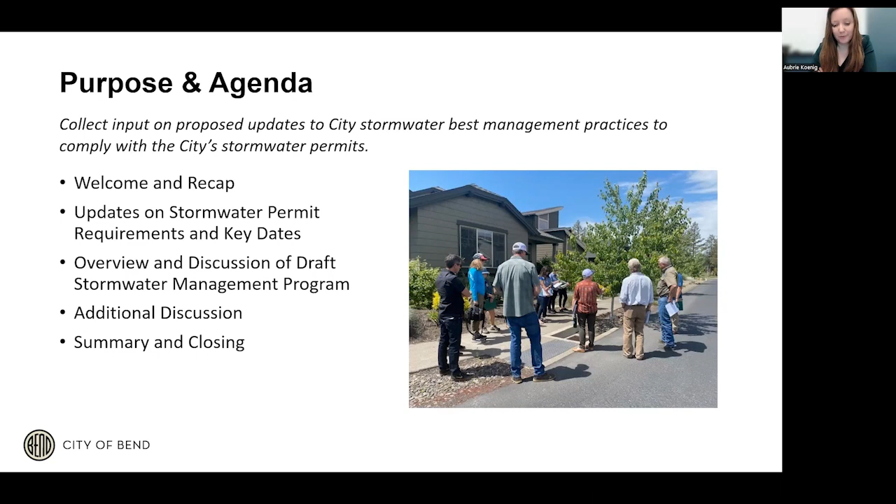And this is one of our photos, if anybody wasn't able to make the tour, or you might spot yourself in that image. As I mentioned, just wanted to think back to that June timeframe. It was our first chance to connect in person. It was really nice to do that, and beautiful day. We got a chance to look at the Alpenglow demonstration garden. Thanks to Amy Jo, we heard from the volunteers. We also did our quick walk through two residential areas and got to see some different aesthetics in practice, to see some regional stormwater facilities and what those looked like.

So I put a couple of images up here, a couple quick reminders, but from city team or anybody else in the room, any other reflections, takeaways from that June tour?

Well, I'm really embarrassed to say that I'm wearing the same outfit today that I wore on that trip. It happens, right? It must be my Utilities Public Advisory Group outfit. It's a uniform.

For sure. And for all of those of you who did provide your notes after the fact, we had handouts for people to fill in ideas and thoughts, and city team has rolled forward with those. Dan is going to be back next month and can give an update on how some of the things he discussed related to water conservation are moving forward too. But I want to note, let's see, I'm looking at the date here on the email. Aubrie, you sent out on August 22nd an email to everybody, and one of the attachments was a review of not only this meeting, but all the meetings we've had to date. Aubrie did a great job, I think, summarizing, but we're interested in folks saying if we missed anything. We're using your input in a variety of ways to move forward on updates to how we implement current standards, how we're developing new ones for development, and things like the public education ideas. So really, much appreciated, everybody, your input.

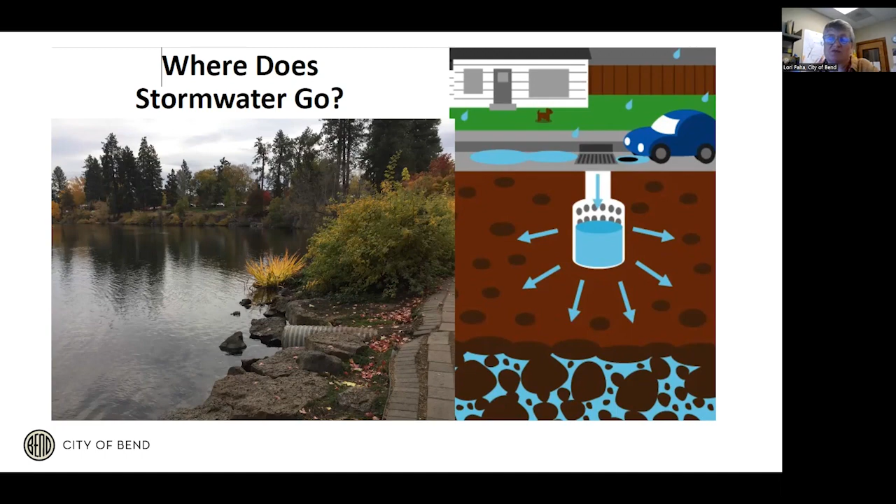Next one, Aubrie. So what's important to remember is the city is so lucky we have not one, but two regulatory stormwater permits from DEQ. Again, they relate to those two different systems: the NPDES MS4 permit, which is National Pollutant Discharge Elimination System Municipal Separate Storm Sewer System permit.

Try saying that five times fast. That's the permit that regulates, or allows us to discharge stormwater to pipes out to the river. So it's regulating it such that we try to keep pollutants out of that system.

The other one, the WPCF, Water Pollution Control F... what does F stand for? Something, what was it? Facilities. Facilities, thank you Elizabeth. Underground injection control permit. So that's for allowing us to discharge stormwater into the ground, potentially impacting the water quality of groundwater.

So two different permits, two different sections of DEQ, two different sections of regulations about all of this. But in Bend we try to combine it together into a single stormwater program, where we're doing most practices like design requirements for new development, or maintenance practices like street sweeping, the same way across the whole city wherever possible. So we put together an integrated plan for both of these, but they both have very specific requirements.

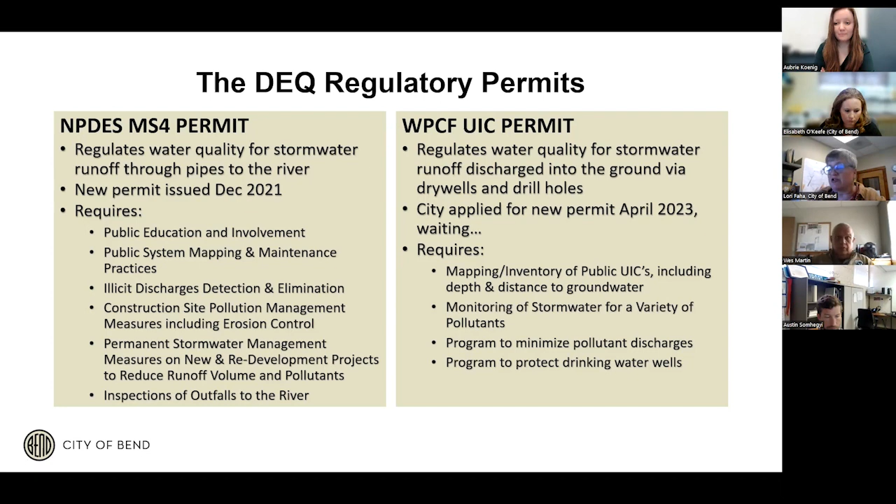So we have that new permit with ongoing requirements and a few new things we have to implement over a certain schedule. Also in April of this year, we had to reapply for a new WPCF permit, the one for discharges to groundwater, and DEQ let us have a combined stormwater management plan again. So what we're discussing today is a plan due to DEQ in November that will address both systems. In April we didn't have to submit a new plan, but we had to submit a permit application—we're still waiting for that new permit, and we had hoped we would have it by now.

DEQ is still putting together what the language of these new permits should look like. There's a whole bunch of cities lined up waiting to get their new permit, and we're partway down in the line. The city of Gresham will get theirs first, and they applied a year ago and still don't have it yet. So there's still a lot of discussion going on statewide about what the new permit language should look like. We're kind of guessing at this point what our program elements should be in regards to discharges to groundwater.

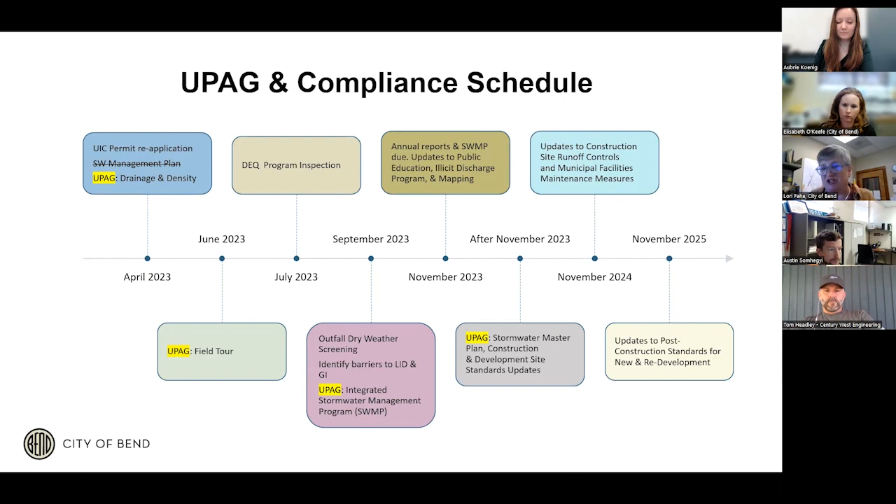In the next slide, I'm going to show you the difference between these two things, but you're going to have the opportunity to be involved in both. So today we're going to talk about this regulatory document called a stormwater management program. It's required by our permits, and it's where we tell DEQ the things we're putting into place so that we can be in compliance with the permits. But there's another document called a stormwater master plan, just to be really confusing, because they have similar names.

So the stormwater master plan is the city's facilities plan for the entire stormwater system. It's not only addressing some of these regulatory requirements, but it's looking at our infrastructure needs, both for water quality and flood control management over the next 5, 10, 20 years. It's where we put together what those needs are, what dollar values are on those, what the priorities are, and then that leads to a rate study to see if we have enough money to do the things we think we need to do, and whether that has implications for rates.

And we'll want your input on all of these things as we start that. We'll probably have the consultant team on board in December, and then we'll start having regular topics maybe every couple of months to come and talk to you about and get your input about, should we change some policies? How should we select the highest priority projects? Is it more important to address flooding under Franklin and Greenwood, or erosion and flooding up on Awbrey Butte, or a smaller, more localized series of major maintenance needs, things like that.

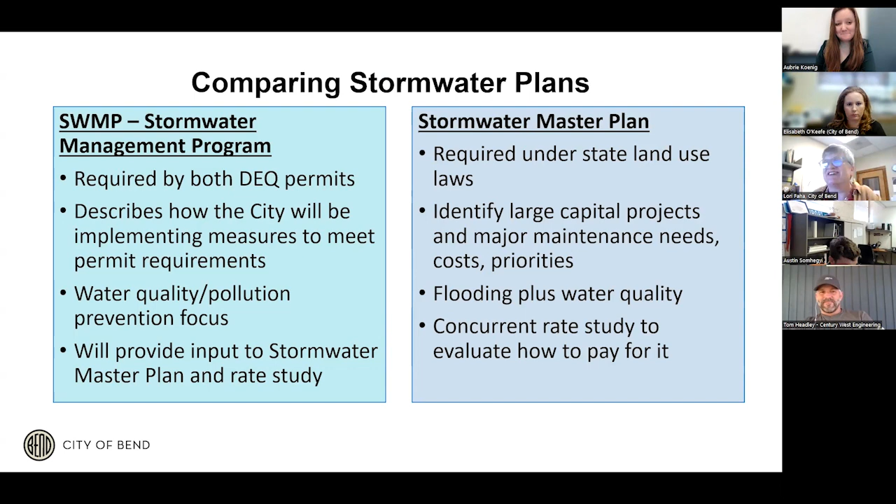And I think that's the end of my slides. And now Elizabeth gets to talk to you. All right, thanks Lori for introducing the topic today.

So we had that in 2007. It was effective from '07 to '12, and then DEQ extended that initial permit all the way until 2021. During that extension period, the city continued to build and improve the program, even though we just had that baseline permit that didn't say much in terms of the details of what we needed to do. The city went ahead and kept developing the program. Then in 2021, at the very end of the year, the second permit was issued, and that's the permit term we're in now, from 2022 to 2026. A lot of the requirements within this second permit we were already meeting because the program had been developed over this 10-year period, through efforts by Wendy and other staff at the city.

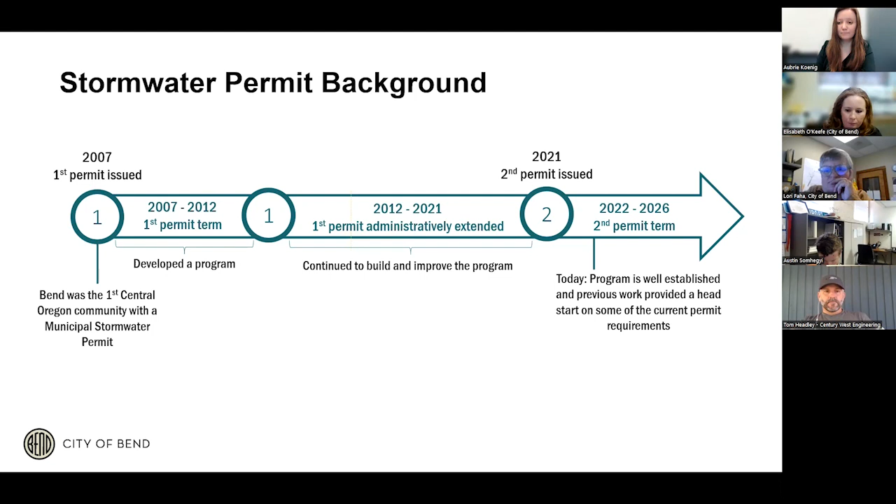So now we're back at the second circle here, so second permit, and we're about to submit what's considered the third iteration of our management plan. That's due this November, and that's for our current permit through 2026.

Next slide. Okay, so now we're getting into the plan's layout and categories. The plan has 8 categories listed here, and they pretty closely follow the categories listed in our stormwater permit. So we have public education, involvement, illicit discharges, construction site runoff, and then we have post-construction, so dealing with new development and redevelopment requirements for stormwater.

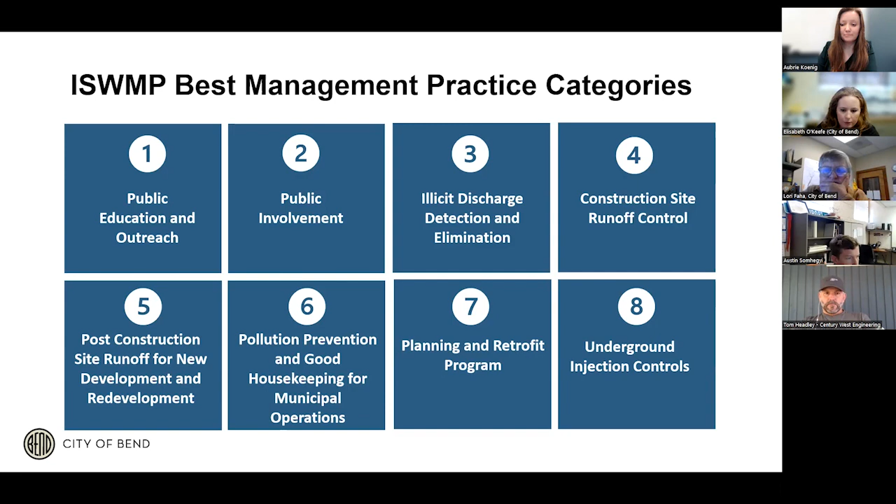And then number 6 is more related to practices that the city does to operate and how we're preventing pollution in those everyday practices. Number 7 is not a specific category in the permit, but it's listed throughout different sections—it's planning and retrofit for our stormwater system. And then we added underground injection controls, because that's covering the other permit to groundwater in this plan. Some of these sections apply to both the MS4 permit and UIC permit, and I'll talk about how those are listed throughout the document.

All right, so here's kind of a comparison of the document structure. So the previous document from 2012 to today used categorization of BMPs that referenced a large performance standards attachment that said specifically what needed to be done. It included descriptions, measurable goals and schedules, specific task numbers, and responsible parties. This document was 136 pages with 35 separate BMPs.

Moving to today, the 2023 document, we've done some restructuring of the outline with the goal of condensing and simplifying. So we have a refined introduction and background. We took out a lot of the financing and administration that was in the former one, kept the most important parts, and then referenced additional materials that are available if people need to look at them. We added a planning and retrofit section, which the previous one didn't have. So we went from 35 BMPs to 28.

There were a lot of old BMPs that could be combined because they were closely related. We also reorganized the template for each BMP, so now we have these tables on the right that list everything in one spot, as opposed to referencing the performance standards attachment.

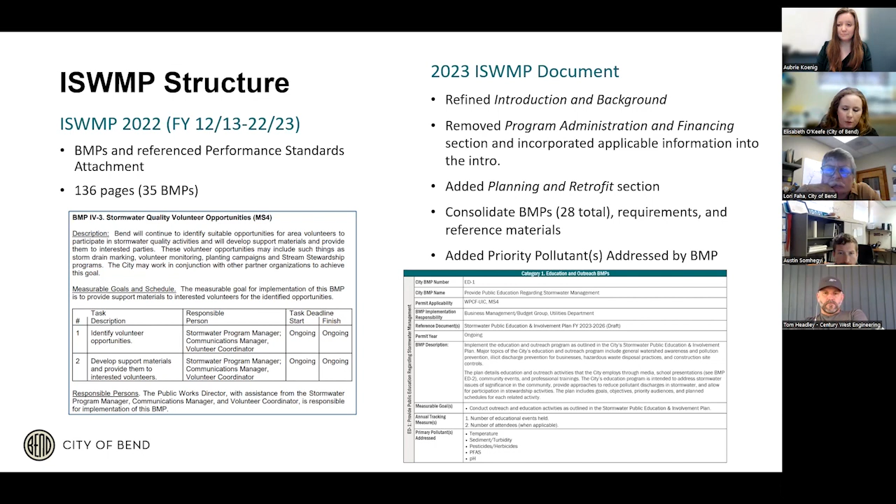This is just a close-up of the one on the previous slide. Each BMP that you see when you look at the document is going to have a number related to the category. For example, education and outreach, all of those are going to have an ED in front, and this is all described through the plan. Then we have the name for the BMP, and here we're saying we're going to apply these requirements to both the UIC permit and the MS4 permit.

So we have that listed for each BMP. Then we're listing the group and department at the city that is responsible for implementing, and any reference documents that go into further detail of exactly what we're going to do. Permit year is really just for the deadline year. This BMP is kind of ongoing because it's something we work on every year, not like a certain document deadline type of thing.

Then we have a short description for each one, measurable goals, and annual tracking measures, which we would provide updates on through our annual report to DEQ. We're really working on trying to align that with the template from DEQ so that we're not having to go back and look for additional information each time we submit a report.

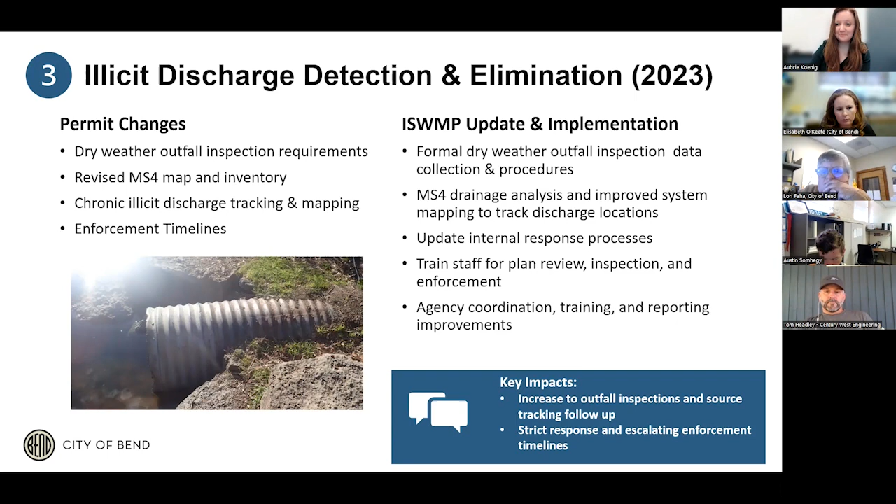Okay, so we do have an updated MS4 map that we've been working on. This section falls under Section 3, illicit discharges, in our permit. We've really been working to identify very specifically the city's MS4 system and drainage areas. This is something that wasn't done in the past. Previously the MS4 was using the natural watershed boundaries, but we've gone in depth and had staff look at how UICs affect our MS4 drainage area.

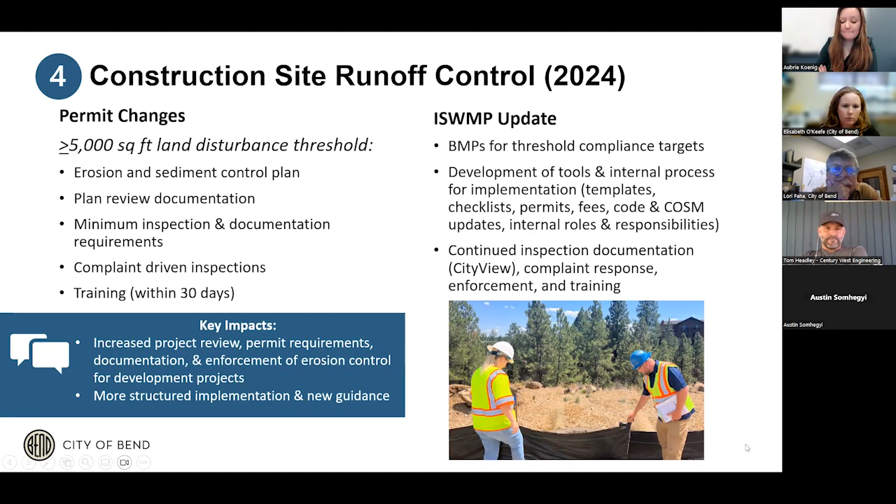Okay, so now we're talking about post-construction controls, and this has a year later deadline than the erosion control. This one's all the way until November 1st, 2025 for implementation. And this most recent permit changed the threshold for post-construction requirements from 1 acre to 5,000 square feet of created or replaced impervious surface.

It's kind of confusing because they use the same number as the erosion control threshold. But this is really just for implementing stormwater controls, like long-term physical controls.

Just a caveat that for Bend, we're kind of already in a good position because we require people to maintain their stormwater on site already. A lot of what we're going to work on is coming up with alternatives for when that water can't physically be kept on site.

Like we talked about in other meetings, drainage and density, increased density especially for housing in Bend, and how we're going to accommodate those locations where it's not even physically possible to maintain stormwater on site anymore.

So some of those things are going to be talked about in the ISWMP document and what we're working towards, including continuing to implement our on-site retention requirement that we have now, which is already a great start.

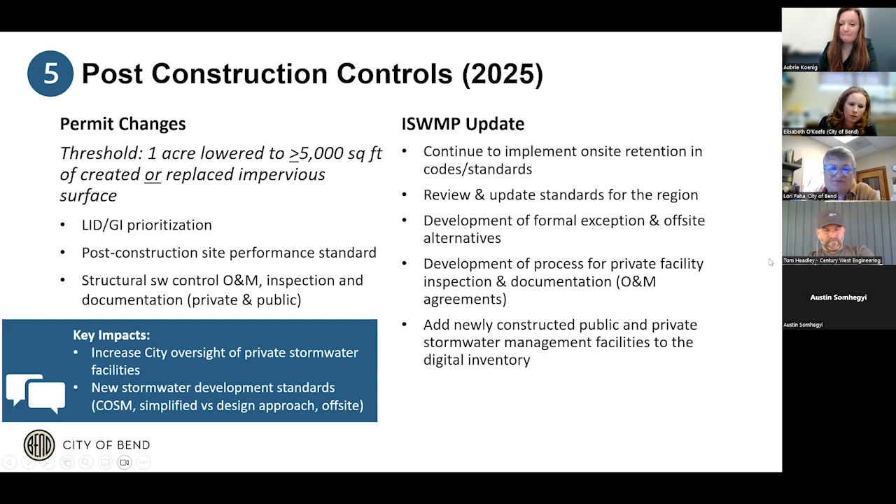Yes, and this topic will come up during stormwater master plan discussions with UPAG as well, as part of master planning. Anyone else have questions about this section?

Nope. Okay, so this is just a reminder of that simplified versus design approach and what we mean by that—having different options for various kinds of development projects. So simplified would be for smaller projects, maybe duplexes or small commercial, really providing them a streamlined approach with pre-made templates and checklists that they're going to be familiar with and staff are going to be familiar with, to improve the process for development or plan review.

And so these would be things only doing really on-site disposal of stormwater. Probably the off-site disposal is going to be for those larger scale subdivision projects. And it would have a short list of measures, kind of easy math, plug and chug type templates for them to use. It would be short with no formal drainage reports.

And then the design approach will have general guidelines, again for larger projects, similar to Central Oregon Stormwater Manual standards, include dry well sites, and have more formal engineering and technical plans that are required for the city to review and approve, as well as the maintenance agreements that are already being attached to deeds.

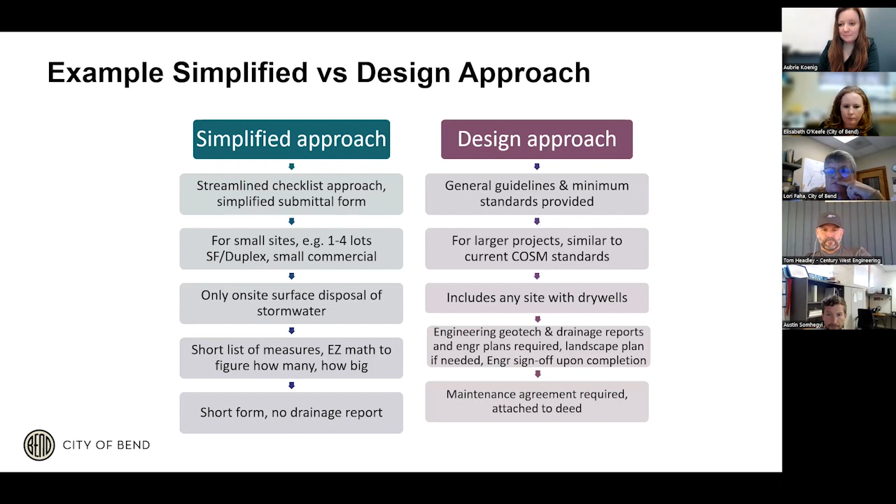As we have the next two years to figure these out and have them in place by November 1 of 25. And this is just, like I mentioned, we are already working on making updates to the Central Oregon Stormwater Manual. As that first step, we're going back through the entire manual with the city of Redmond and identifying areas where both cities think there needs to be some updates and changes. So we have myself, Lori, and a bunch of engineers from both cities, development engineers, in this process to inform those changes that will be made.

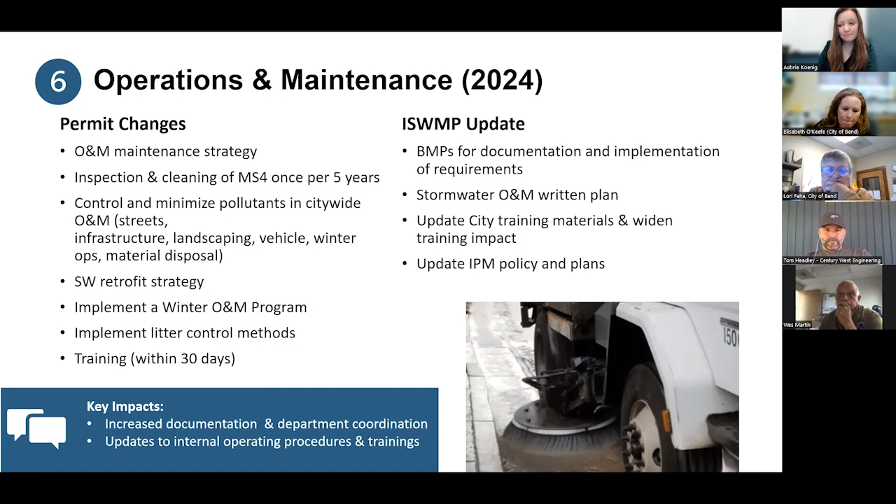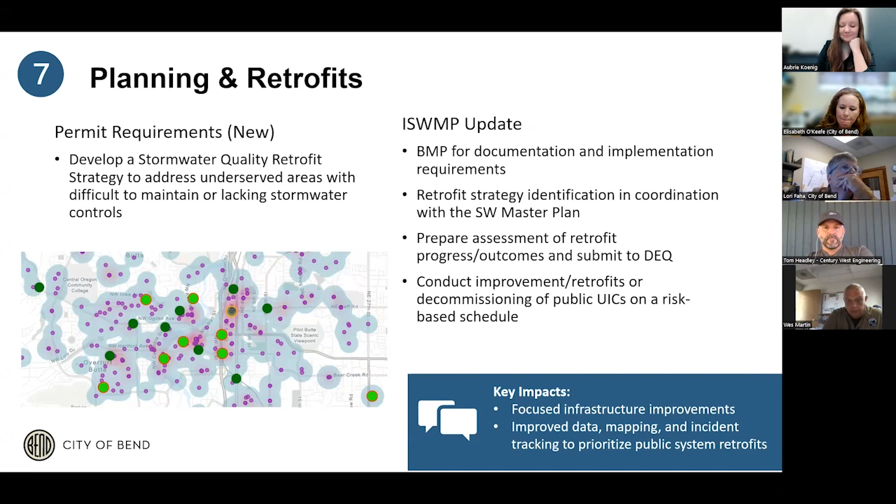So like Lori mentioned, we have the current UIC permit we have. We've had it since I think 2011. So it's been administratively extended from April of this year when it expired, and we reapplied, and we are waiting to get that new permit along with other cities in Oregon.

We're going to also probably have additional reporting requirements in the new permit, as well as implementation of DEQ Online. DEQ Online is the Department of Environmental Quality's new database to track a lot of their programs, and they've already kind of started this online system for UIC tracking.

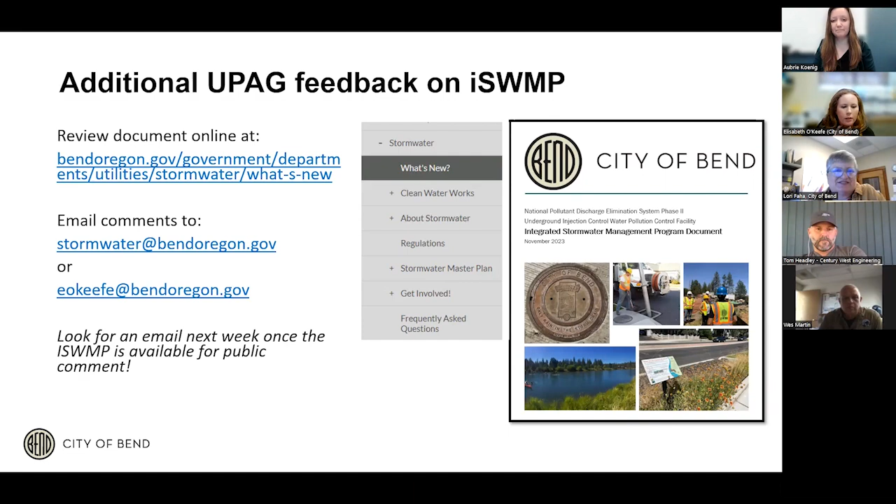We'll send these slides out as a PDF. If you're now interested in reading the whole document and giving us comments, you'll click this and it'll take you to where the document will be placed next week. Where it says review document online and you click that link, it takes you to the stormwater program's what's new page, where we're keeping this information for review. Where it says document link will be available soon, we'll link to the full draft plan there, most likely next Monday, September 11th. It'll be posted for a month, and if anyone has comments they can send them to that email listed or to my own email, they both come to me. Either email, any comments or input you have we'd appreciate very much. The final version we'll submit to DEQ by November 1st with our annual report.